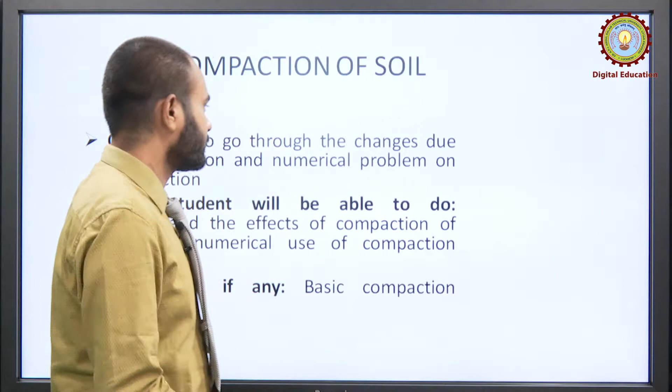Today let us move forward and see the effect of compaction on different parameters of the soil. We will go through the changes due to compaction, and we will also solve some numerical problems. Let us see one by one.

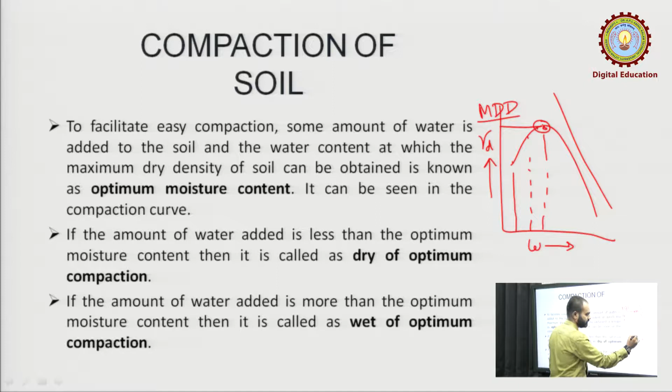First, recall what we discussed about compaction and the compaction curve. Here we have water content on one axis and gamma d, or dry density, on the other. At different moisture contents we get different gamma d values, and the highest value is called MDD, the maximum dry density.

Corresponding to this maximum dry density, there is a water content named OMC, optimum moisture content, or OWC, optimum water content. We already discussed this in our last class. This line was actually the zero air void line.

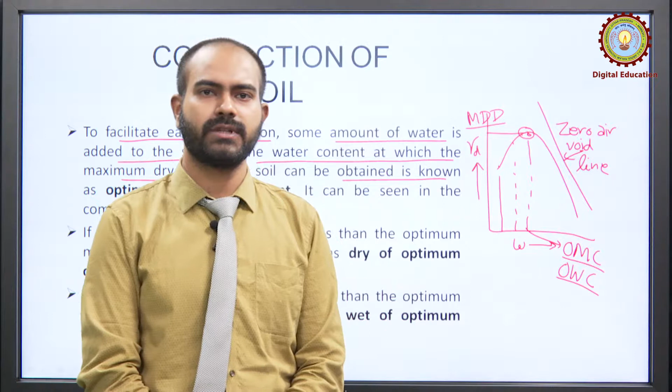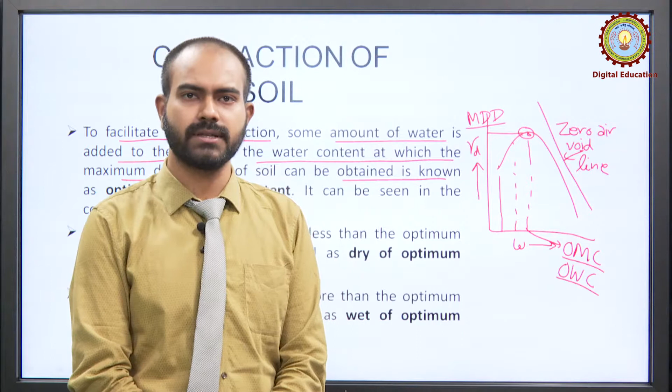Now let us see further. To facilitate easy compaction, some water is added to the soil, and the water content at which maximum dry density is obtained is known as optimum moisture content. If the soil is dry, compaction will be hindered because the particles remain in flocculated form, resisting compaction. But as we increase the water content to a certain level, the particles get dispersed, allowing better compaction.

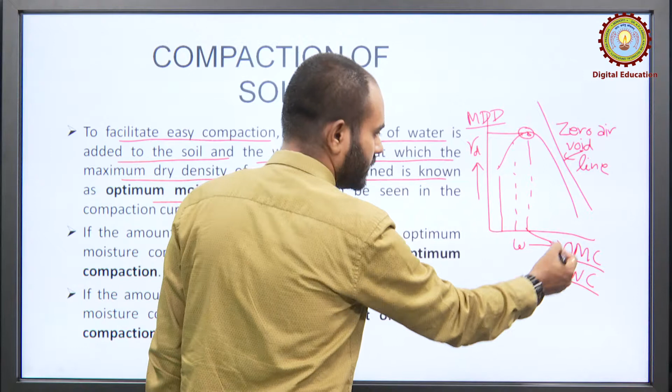But remember, it is not always the case. Only up to a certain level will the MDD be obtained or increase; after that, it will decrease slowly. So if water is added to the soil up to a limited amount, we get the maximum dry density, and the corresponding point is called OMC, or optimum moisture content.

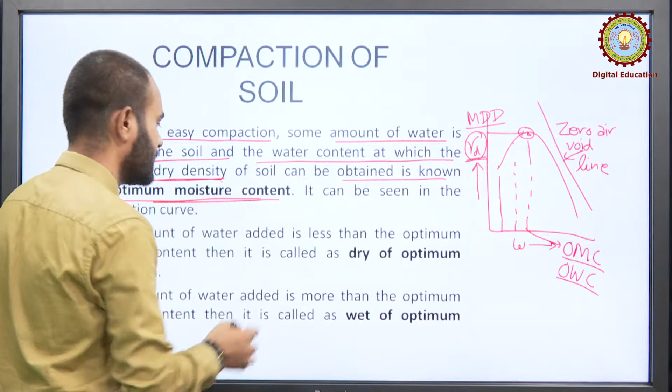Now if the water content added is less than the OMC, it is called dry of optimum compaction, and if the water content is more than OMC, it is called wet of optimum. If this line is your OMC, the area on either side is divided into two parts: compaction done on one side is dry of optimum, and on the other side is wet of optimum.

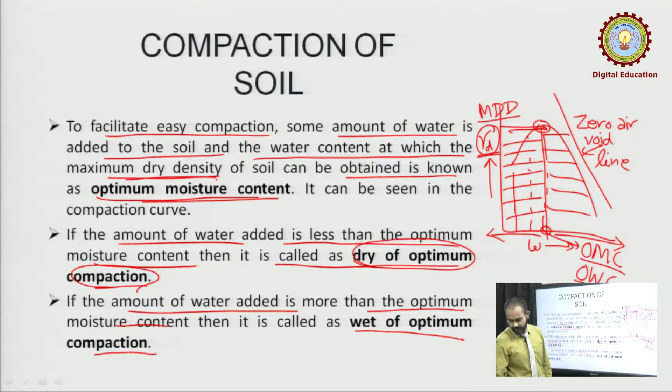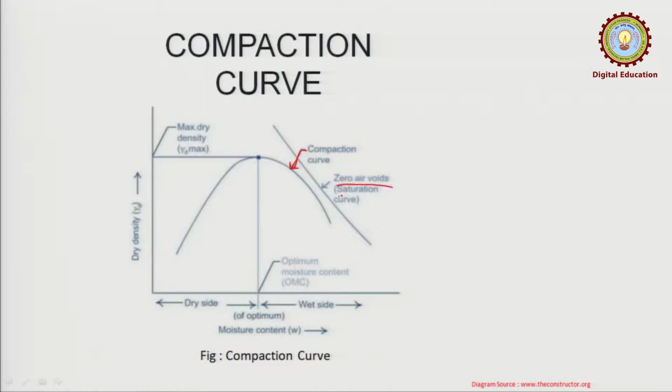You can see the graph here. This was the compaction curve, and this was the zero air void line. This point is OMC, as I just told you, and this is MDD.

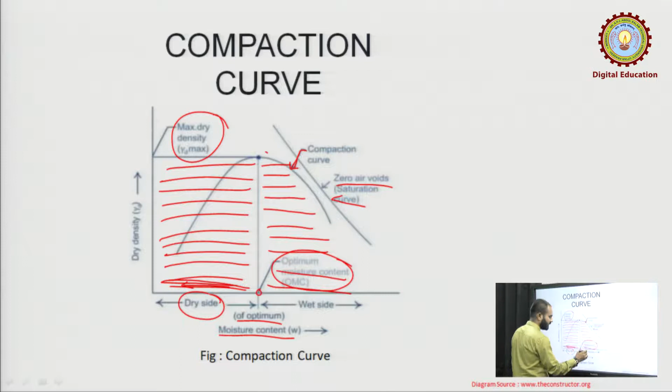Now this part, where the water content is less than OMC, is this area, where we have less water content. In this other area, the water content is higher than OMC. So since the water content is less than OMC here, we call it the dry side, or dry of optimum, and the other side is called wet of optimum, or wet side.

Now when compaction is carried out in this area, it is called dry of optimum compaction, and when carried out in this other region, it is called wet of optimum compaction. So this is the general or basic concept.

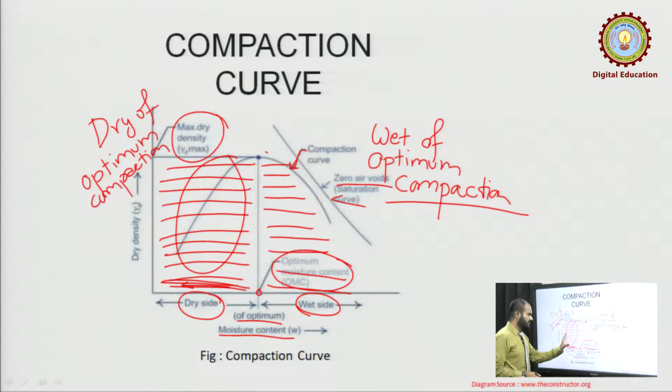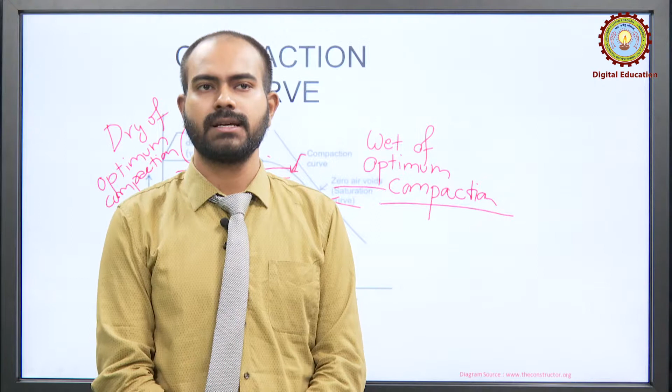Now what we will be doing is discussing one by one the parameters of the soil that get disturbed or changed due to the different procedures of compaction. Let us see the main features which get affected due to compaction.

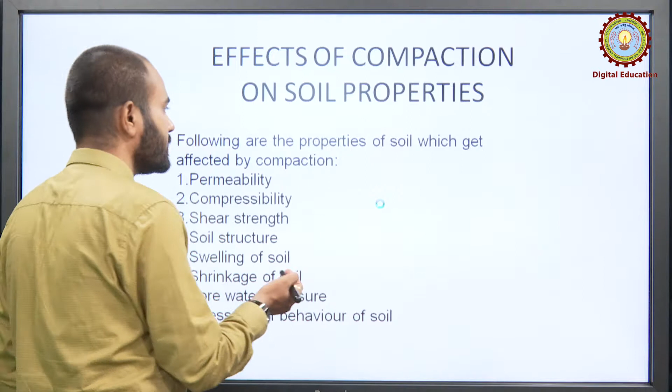Effects of compaction on the soil properties. What are the properties which are mainly affected due to compaction? Permeability, compressibility, shear strength, soil structures, swelling of the soil, shrinkage of the soil, pore water pressure and stress strain behavior of the soil.

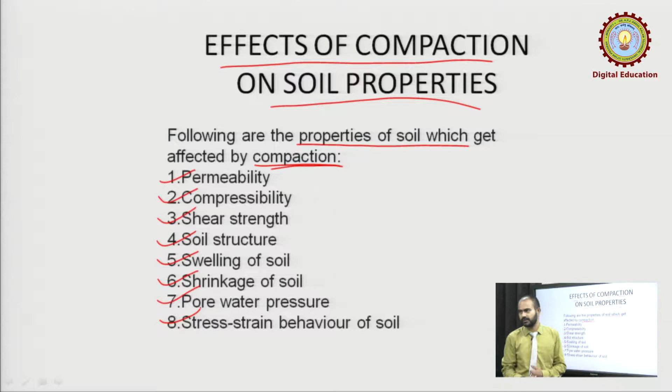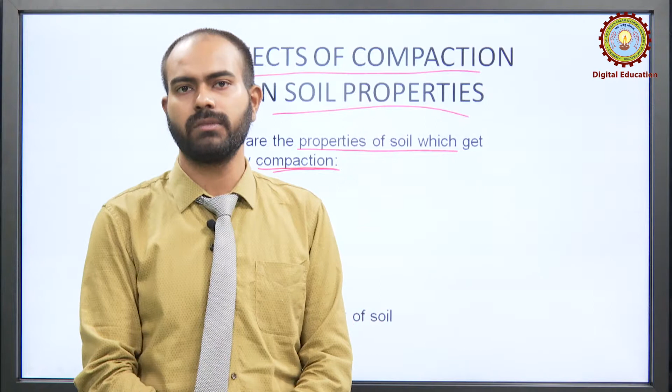Now we will be discussing one by one. We will divide this study into two parts, as I have already told you, the dry of optimum and the wet of optimum. We will see how the property is affected if we compact it on the dry of optimum side, and how it is affected if we compact it on the wet of optimum side. Let us see one by one.

The first one, permeability. You know what is permeability? It is the ease with which, in our case, generally we will be talking about soil. Let us talk about water only, because soil generally encounters water only. So ease with which water is permitted through the voids of the soil.

This is the meaning of permeability. Now let us see how it gets affected. Compaction reduces the voids present in the soil, hence permeability also reduces. You know that before compaction, the particles are flocculated, it may be flocculated something like this. Now when we increase the water content to an extent, or we are talking about compaction, if compaction is made or dynamic force is applied, what will happen? The flocculation will break, it will come into somewhat an arranged way. If it comes into an arranged part, then what will happen?

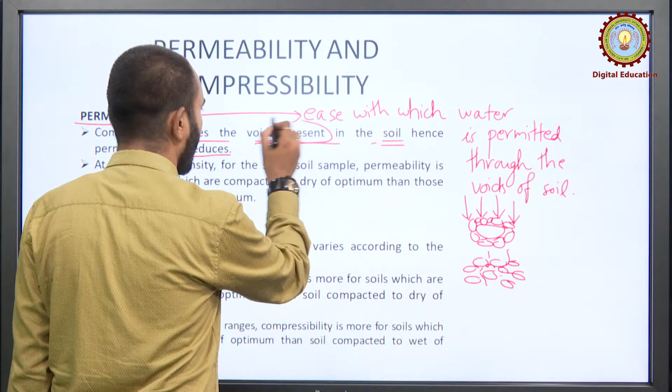The permeability will obviously decrease. Here it had a large permeability, you can see. Now the permeability has reduced. The voids have reduced, because what is compaction? It is the process of omitting the voids from the soil. So if there is no void, how will the permeability be affected? Obviously it will get reduced.

Now, at a particular density, for the same soil sample, permeability is more for soils which are compacted dry of optimum than those compacted wet of optimum. What does this mean? Same soil, same density. So if we say the density is same, you can say something like this, this is gamma. So same density, we are talking about same density here, and same soil, obviously it is the same soil or a single soil.

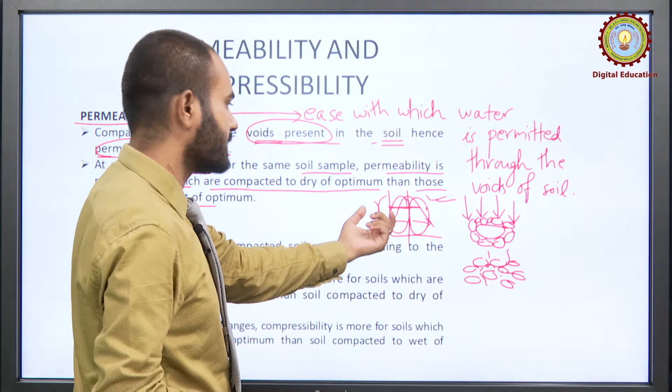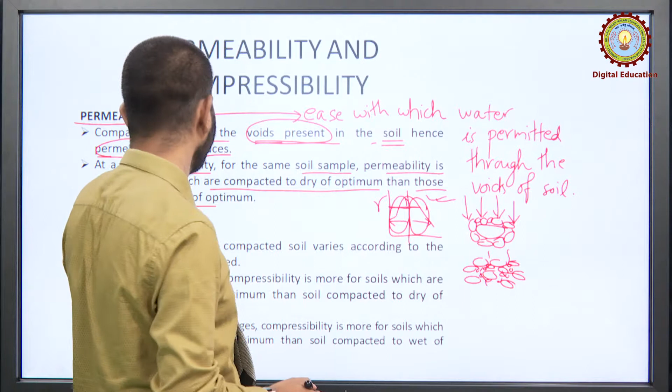Permeability, if the compaction is done on the dry of optimum side and wet of optimum side, if it is done on this part, what will happen? Permeability is more, and here the permeability is less. Why is it so? Because in this part, if the soil is compacted, the moisture content is less. So there is air in the voids, more air will be present in the voids.

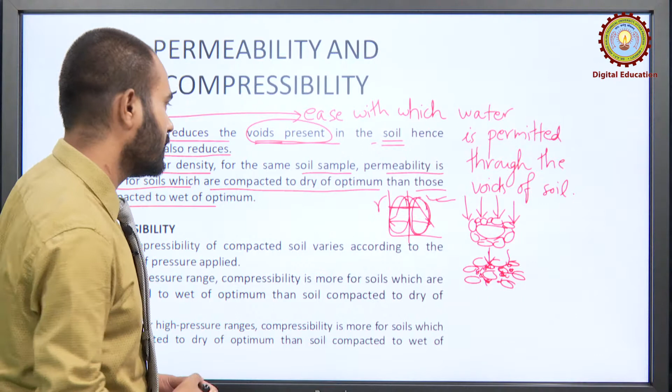Since more air is present in the void, the water will be easily permeable through these voids, pushing the air away. But in case of wet of optimum, the water has already replaced the air in the voids. So now it has to do more effort to push the water and move through the voids. Due to the same reason, permeability is more in the soil compacted dry of optimum, and otherwise less in the wet of optimum.

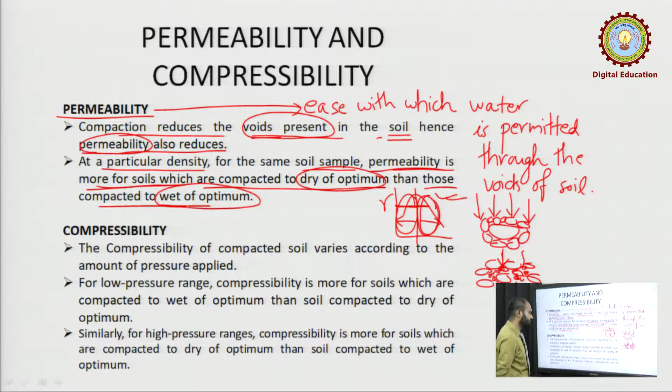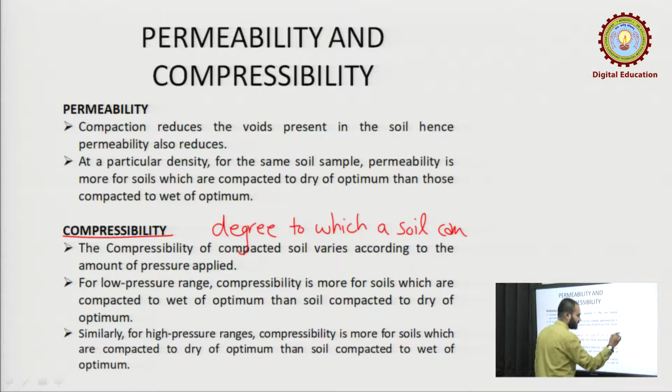So let us move further. Compressibility. What is compressibility? It is the degree to which a soil can be compressed. This is called compressibility.

Now let us see how it will be affected due to compaction. The compressibility of compacted soil varies according to the amount of pressure applied. Obviously, it will depend upon how much compaction force you are applying to that soil. If you are applying low pressure range, meaning low compaction energy, then what will happen? Compressibility is more for soils which are compacted wet of optimum than the soil compacted dry of optimum. What does this mean?

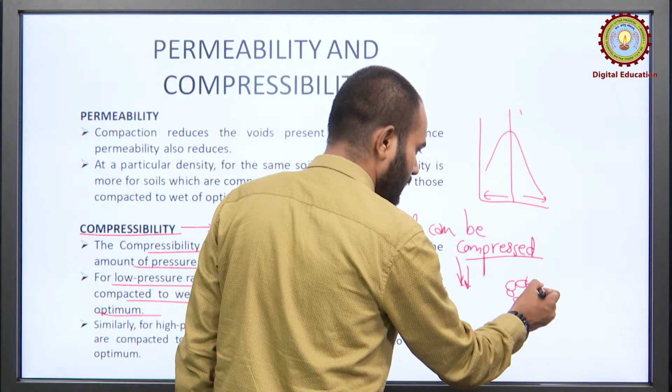If there is low pressure, suppose this is the curve. Now we are talking about this side and this side. What will happen in the compressibility part? You know that when the soil is in dry state, it will be in the flocculated form. And once there is flocculation, it will resist more. It will resist the compaction energy more, or we can say that it will not get compacted easily, or it will get compacted in a lesser manner.

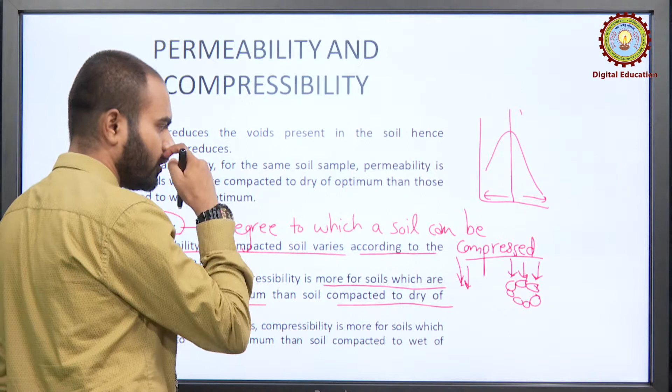So due to this, what will happen? The compressibility will be lesser, because it does not get compacted or compressed. It will try to retain its shape of flocculation.

But if we move further, when the moisture content is increased, what will happen? They will get dispersed, and somewhat arranged in this manner. If there are other particles like this, and we apply the compactive effort, this will get arranged, something like this. So the volume, suppose this was like this, now it will get compressed and become like this. So we can see that the compressibility is more now.

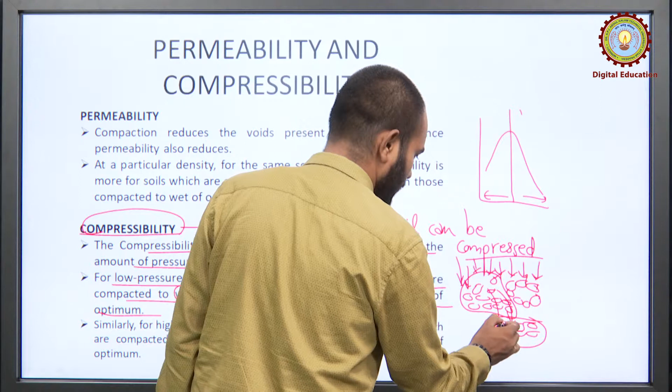So, more compressibility in wet of optimum and less in dry of optimum. This was for low pressure. Now, in case of high pressure range, what will happen?

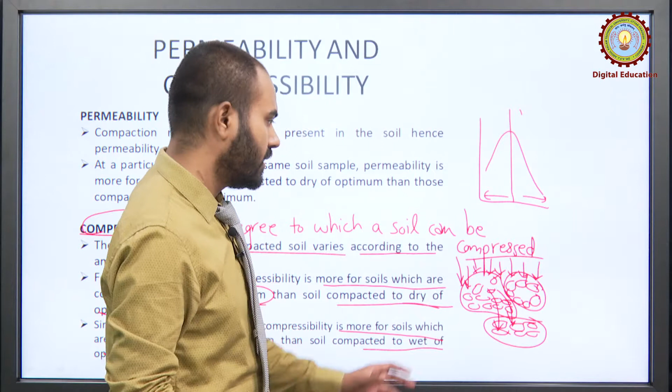Compressibility will be more for soils compacted dry of optimum than those compacted wet of optimum. Why? As I already told you, in dry of optimum the soil structure is flocculated. Flocculation means in the low range, if pressure is applied, they will resist the force and won't get compressed.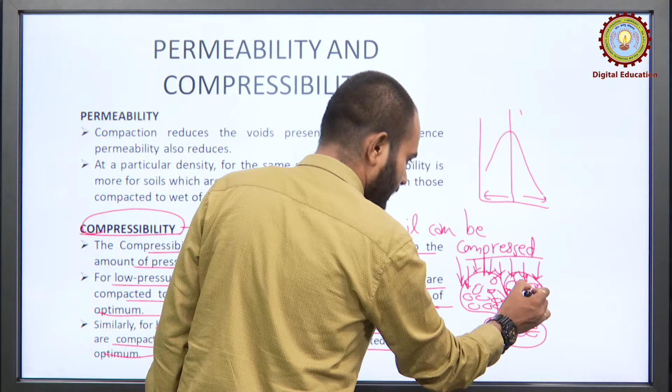But once you increase the pressure range, what will happen? Due to this, they will get broken, their bond will get broken due to high pressure, and they will get arranged something like this. So compressibility will be very high, because you can see there was a huge void here and now it has reduced to a minimal point. So the compression will be very high in this case.

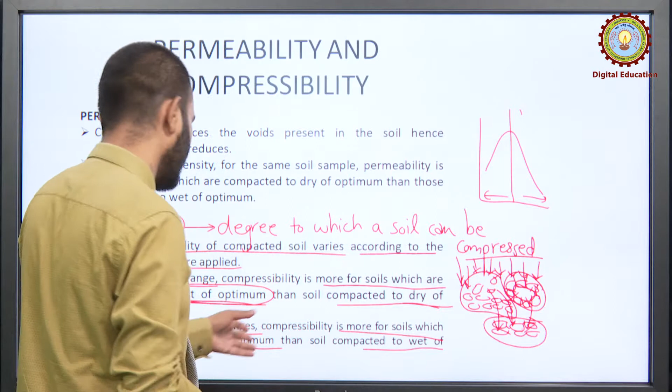Let us move further and see what will be happening in wet of optimum. In wet of optimum, they already get arranged in a good manner, so some arrangement is done by the compaction only. That much arrangement can be done by the low pressure range as well. So applying high pressure range to the wet of optimum won't give you high compressibility, because it is already arranged in the most compressible way. So comparatively, the degree of compression will get reduced in this part and will be very high in the other part.

So this was the concept. Now let us move to the next.

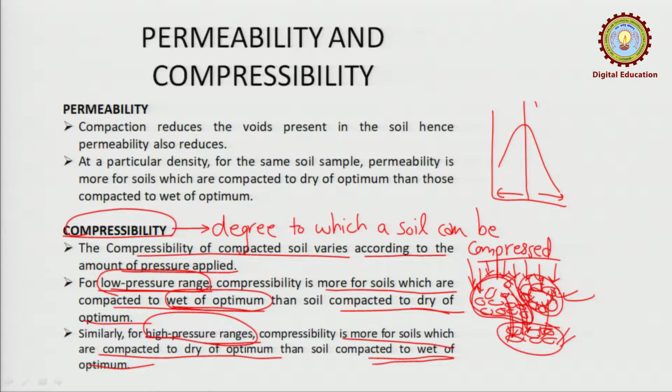Shear strength. I think you know what shear strength is, I have already spoken about this. Now let us see how it will be getting affected.

Shear strength of soil compacted dry of optimum is more than that compacted wet of optimum at low strains. Again at higher strain, compacted wet of optimum will have more shear strength. What does this mean? The shear strength is actually the bond between the soil which will be resisting the shear. Somewhat you can say, if this is the ground, shear means it will break from here, this part will move relatively, this will move down, this will move up, something like that.

So this will be shear. Now, if we compact on the dry of optimum, the shear strength will be more. Dry of optimum means less moisture content - remember this is dry and this is wet. So in the shear strength part, if soil is compacted in the dry, then more shear strength than the wet. Why? In the low case only.

Why is it so? Because as you know, in case of shear strength we have to compact the soil greatly. The more the soil is compacted, the more the bond strength will increase, so they will resist the movement like this. In case of dry of optimum, there is flocculation as I already told you. This flocculation is good in strength, because at low strain it will not break, as I told you just before - it will try to retain its shape.

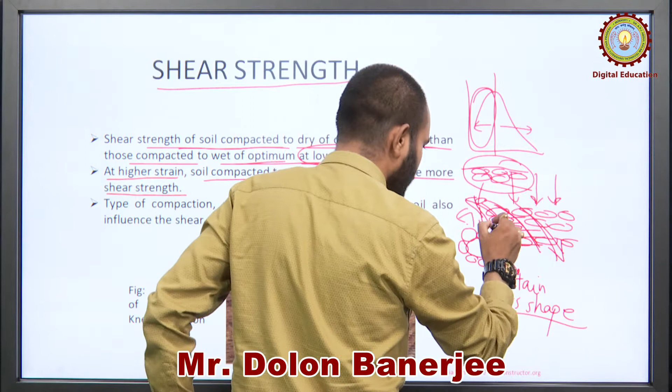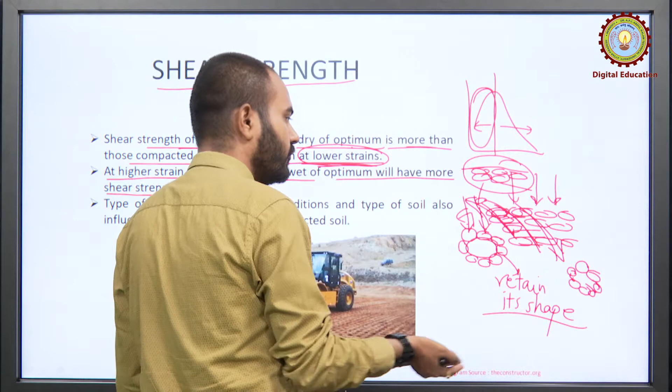At low strain it will try to retain its shape. So what will happen due to this? At the dry of optimum, we can say this will show more shear strength. Why? This will form like this. If it is a flocculated structure, they are bonded in a greater manner, then if compacted in the dry of optimum part, this will not break, this will remain as it is. So this won't allow any relative movement between particles, they will remain as a single body. So shear strength is more.

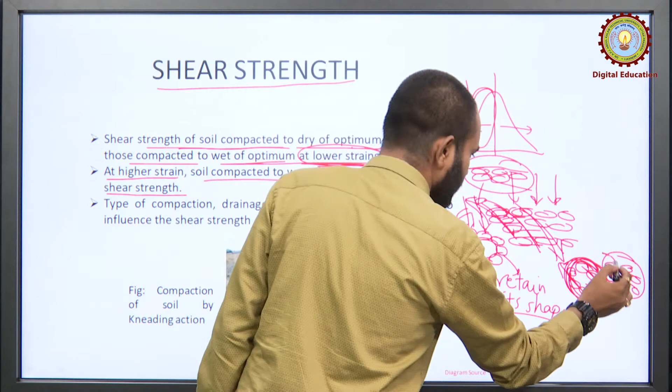But if it is wet of optimum, then what will happen? This will get dispersed, and due to which shear strength gets reduced. At higher strain, as already mentioned, this gets broken into something like this. So what will happen now? As it is already broken, there the possibility of shear strength will be more. So it is written that soil compacted to wet of optimum will have more shear strength, because in the dry part, what has happened now, it has gone to dispersion.

Besides shear strength, the shear strength parameter also depends upon type of compaction, drainage condition, and type of soil. You know that different soils are compacted in different ways. This diagram shows kneading action, which is generally used for cohesive soil. You can see the projections on the roller. When the roller rolls from here to here, you can see patterns made on the ground, because this gets inserted into the ground, causing the kneading action. This is generally favorable for clayey or cohesive soil. So different compaction methods also affect how the shear strength will behave.

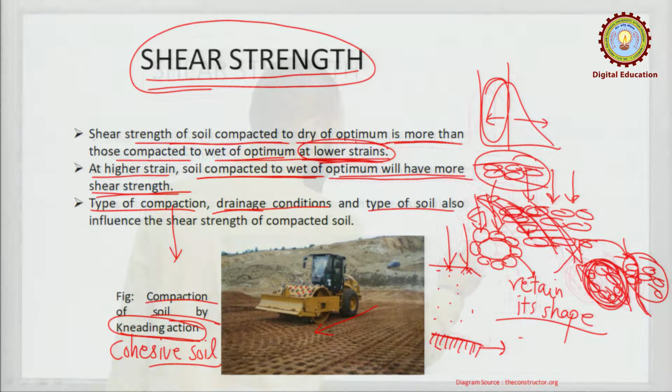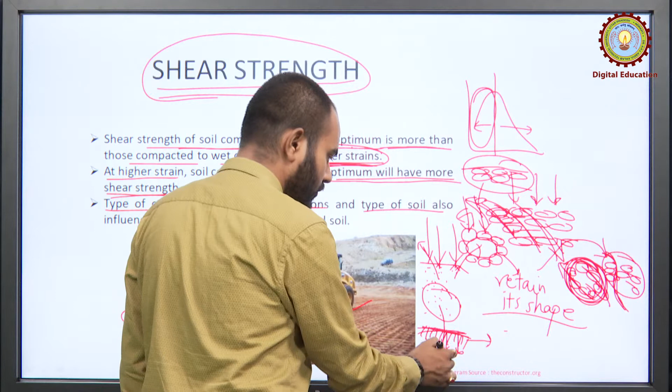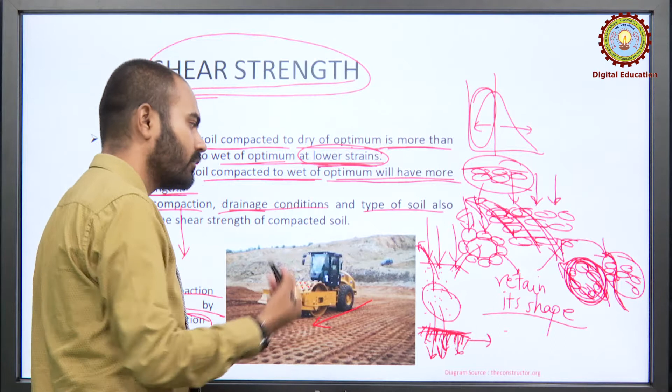Drainage condition - what do you mean by that? Suppose there is a ground, just assume this is the whole soil, this is the ground and somewhere there is rock, or hard impermeable strata. Now what will happen? Once you are compacting it, there will be water and air in it. Air gets oozed out due to compaction. What about water? If drainage was allowed on this part also, then some part of the water would have gone out from this part and some from that part. Now, as this is already restricted because this is rock, it won't let water go out. Only that amount of water which can go out from this face will be able to move out.

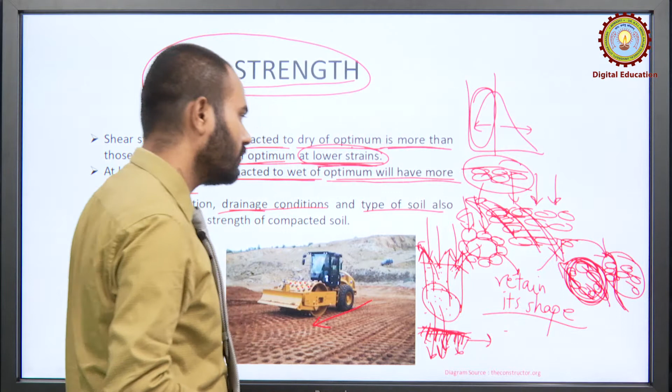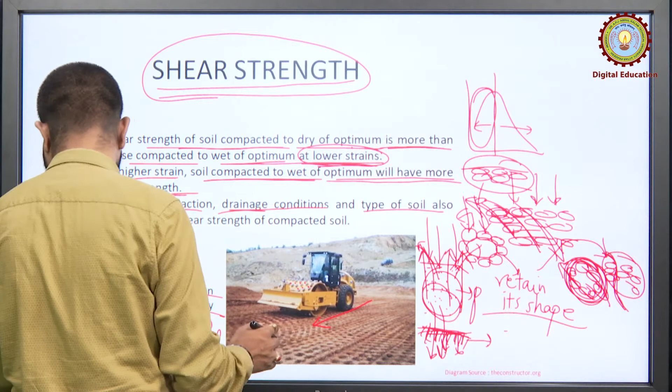Due to this, the drainage condition, or the water inside, will also cause pore pressure. Remember, this is the ground and this is the soil. So once water starts getting out, the part which won't be able to get out will cause pore water pressure. So due to this also, the shear strength gets affected.

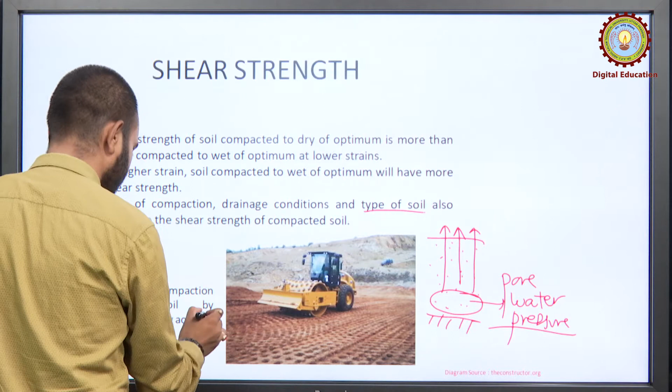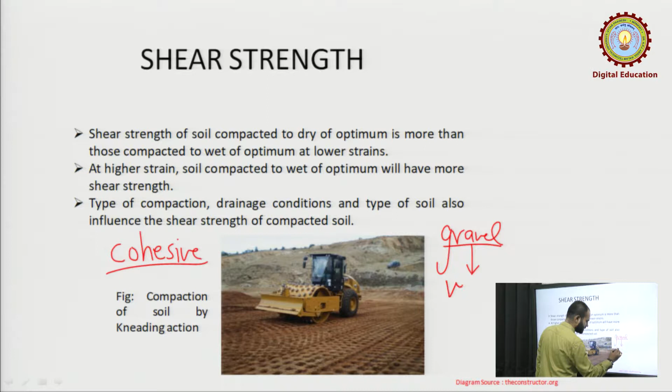And type of soil - obviously you know, mainly the shear strength concept is related to cohesive soil, only mainly related with cohesive soil. Cohesionless soil such as gravel will show very little shear strength. So this was the case, let's move forward.

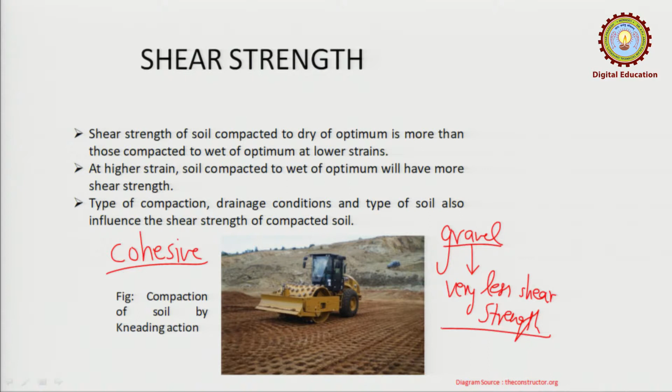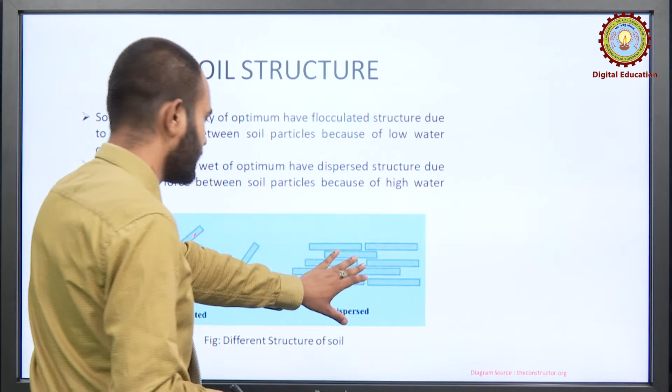Soil structure - as you have seen in the figure, this is the flocculated and this is the dispersed one. So what are we relating with this? Soil compacted dry of optimum has flocculated structure due to the attraction between soil particles because of low water content. Soil compacted wet of optimum has dispersed structure due to repulsive force between soil particles because of high water content. This I have already explained before as well.

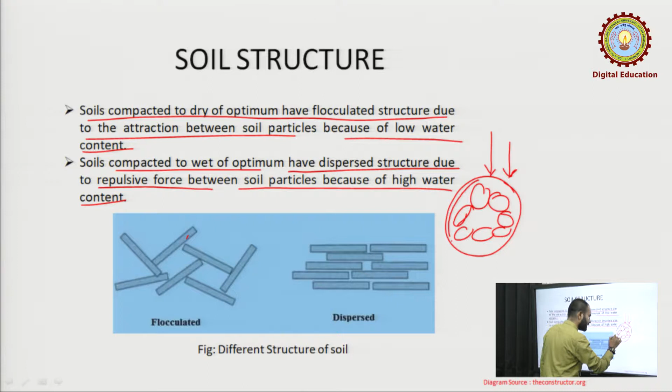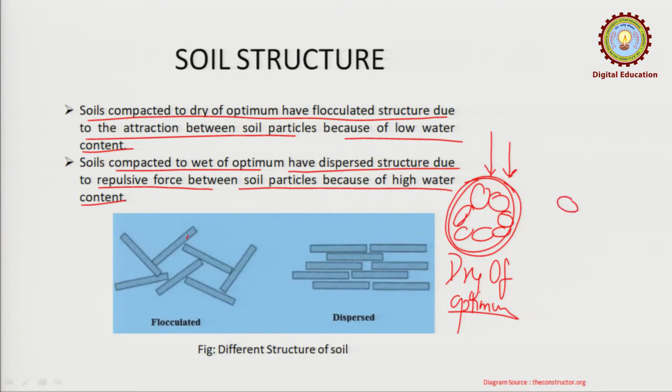On the dry side of optimum, the structure of the soil will be flocculated, something like this, and they have good amount of energy to resist the compactive effort. So the structure of the soil after compaction may also remain flocculated - this was for dry of optimum. And in case of wet of optimum, what will happen? Some gets already arranged and some may remain like this. Once you compact them, this will come like this, as you have seen here also. So this is wet of optimum.

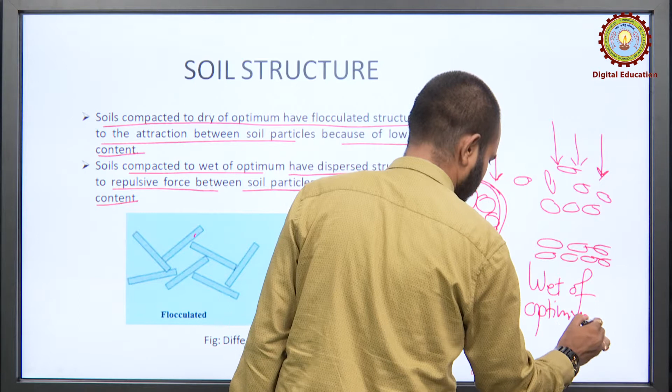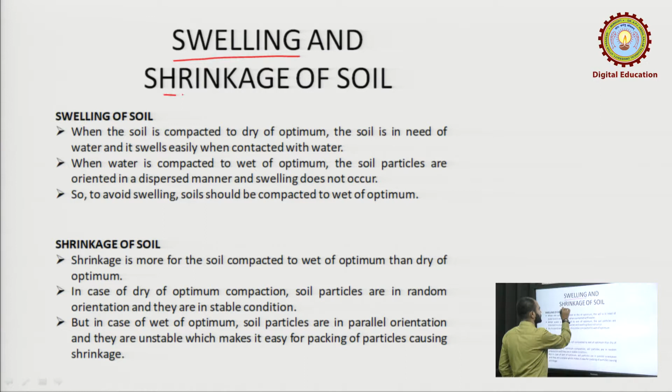Okay, so this is the case: swelling and shrinkage. What is swelling? Actually, swelling of the soil means when we add water, how much volume change it shows. Okay, this is what swelling means.

If you remember, we already talked about Montmorillonite and kaolinite, and we talked about the activity of the soil. So what was happening there? The swelling was very high due to these two, kaolinite and Montmorillonite, and also illite. These three were causing the high swelling of the soil, so we also termed it as expansive soil.

Okay, so now let us see how it is related here. When the soil is compacted to the dry of optimum, the soil is in need of water and it swells easily when contacted with water. When the soil is compacted wet of optimum, the soil particles are oriented in a dispersed manner and swelling does not occur. To avoid swelling, soil should be compacted wet of optimum. This is an important part.

Now, shrinkage of soil. What is shrinkage of soil? Just opposite to swelling. What does this mean? Once you remove water from the dry part or wet part, what will be the effect of this removal on the soil structure or the soil itself? We will be seeing this now.

Shrinkage is more for soil compacted wet of optimum than dry of optimum. Why? Because here there is already a lack of water, so there will be less water. If that much water is removed, some volume change may occur, but it will be less than the volume change here, because here we have a large amount of water, so the particles are dispersed. More water will get removed once you cause shrinkage here, or remove water from the wet of optimum part. So due to this, more shrinkage will be shown by this part than the other.

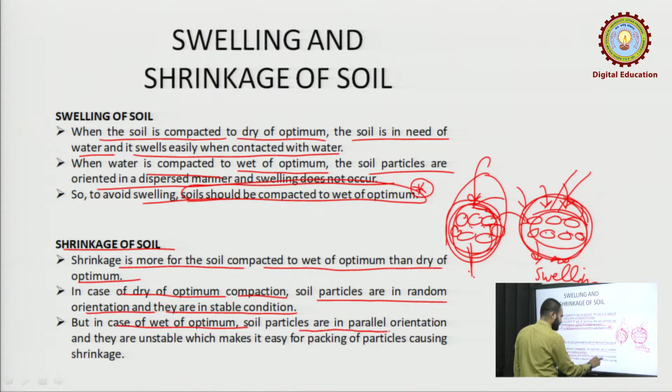The same is written here. In case of dry of optimum compaction, soil particles are in random orientation and they are in stable condition. Stable means they are not dispersed. They are already in this arrangement and they remain so even though water is removed, so there is less shrinkage. In case of wet of optimum, soil particles are in parallel orientation and they are unstable, which makes it easy for packing of particles, causing shrinkage. So this is talking about the same phenomena.

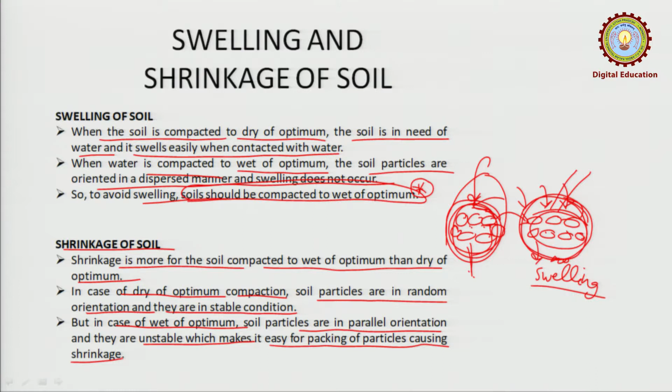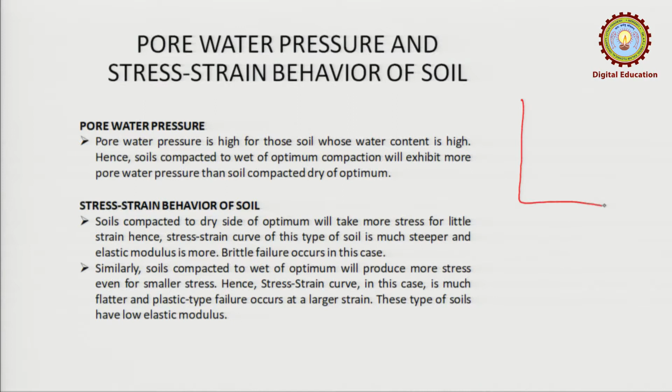Pore water pressure and stress strain behavior of the soil. What is pore water pressure? As I have already told you, water will be higher in one part and lower in another. Pore water pressure is caused by water. This is the pressure caused by water on the particles of the soil. If there is water here, it will cause pressure to it. This is the pore water pressure.

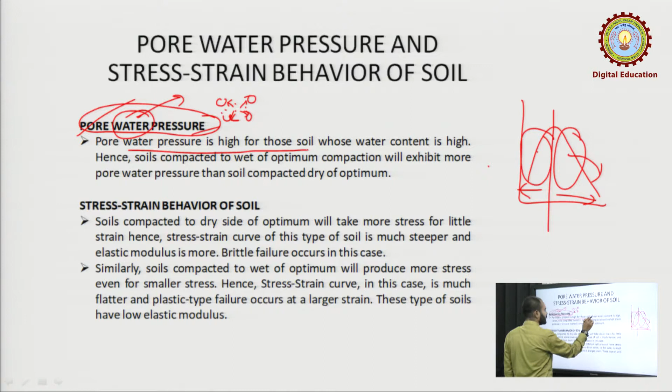So obviously, where we have less water, pore water pressure will be less, and where we have more water, pore water pressure will be more. Pore water pressure is high for soils with high water content. So soils compacted wet of optimum will exhibit more pore water pressure than dry of optimum. This is a simple concept.

Now, stress strain behavior of the soil means it is talking about the graph, something like this and something like this. Soils compacted to dry of optimum will take more stress for little strain. Hence, the stress strain curve for this type of soil is much steeper and the elastic modulus is more. Brittle failure occurs. This is the curve.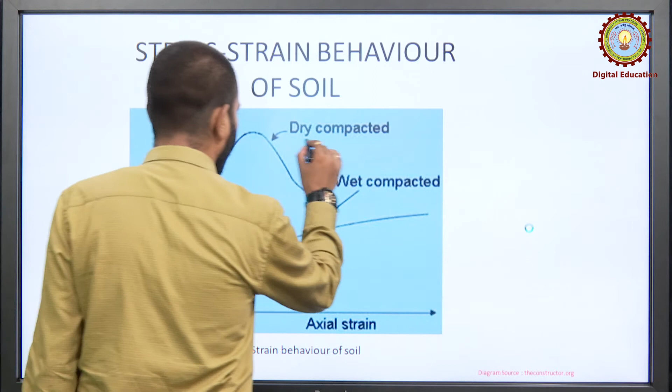We can see this in the next diagram. Here it is, this is for dry compacted soil and this is for wet compacted. What is the difference? Here, as there is a flocculated structure as I already told you, it can take very high stress without much strain. Strain is the change in dimension or length, delta L upon L, generally referred to as strain. So without much change in structure, high stress can be borne by these types of structures.

Why? Because they are flocculated and already bonded together in a good manner, with good strength. So up to a part you can see the stress is increasing very rapidly, but strain is not increasing comparatively. It is very high and it is low.

No dimensional change is taking place, because it can bear that much stress. But after that, what happens? This bond breaks. This is brittle failure, and you can see a sudden decrease in stress. Why? Because now this bond breaks, due to which the graph reduces.

In case of wet compact, what will happen? Gradual increase. You can see there is a gradual increase in the graph. What does this mean? Corresponding to the applied stress, the strain will increase, because now there is no such structure to resist. As you increase the stress, the strain will increase. So this gives a gradual increase.

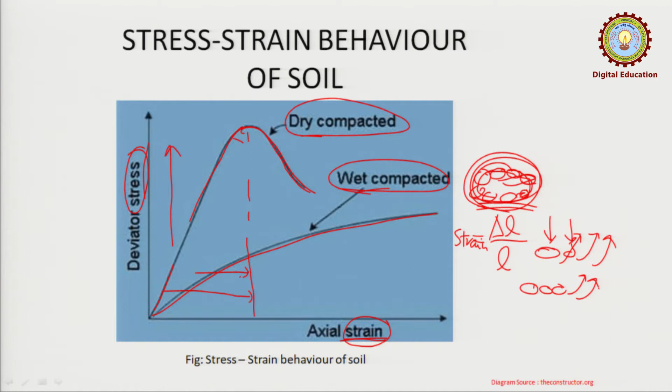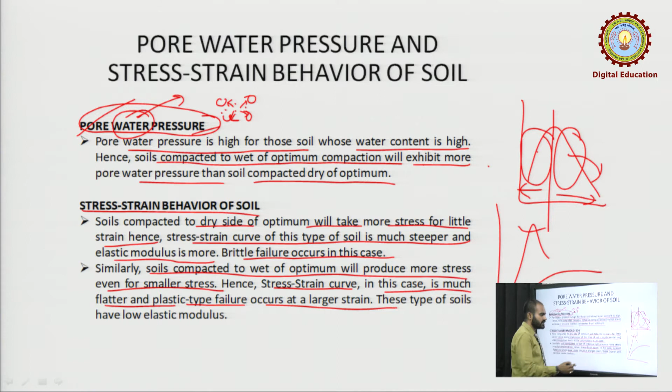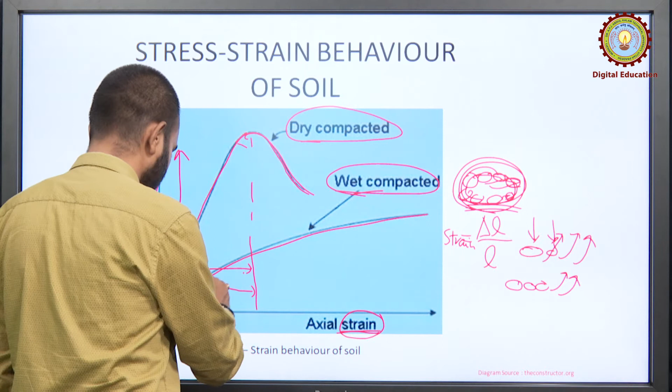Similarly, soil compacted to wet of optimum will produce more strain even for smaller stress. Hence the stress-strain curve in this stage is flatter, and plastic type failure will occur. What is plastic type? It means gradual failure. This is called brittle failure, and this is the plastic failure. In plastic failure, no definite point of failure can be obtained - there is no definite point, you cannot understand exactly where the failure has occurred. But in brittle failure, you can say here the failure has occurred.

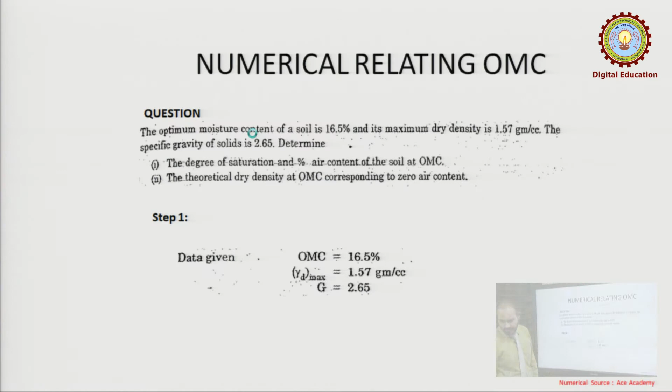Now let us go to a numerical problem about the optimum moisture content. Let us see what is given to us: the optimum moisture content of a soil, the maximum dry density, and the specific gravity of the soil solid are given. We need to determine, first, the degree of saturation and percentage air content at OMC.

Second, the theoretical dry density at OMC corresponding to zero air void - this is a different case. First let us see this one, this is an easy question. You know what we are given: OMC is given, maximum dry density is given, and G is given. We can use again the formula W into G.

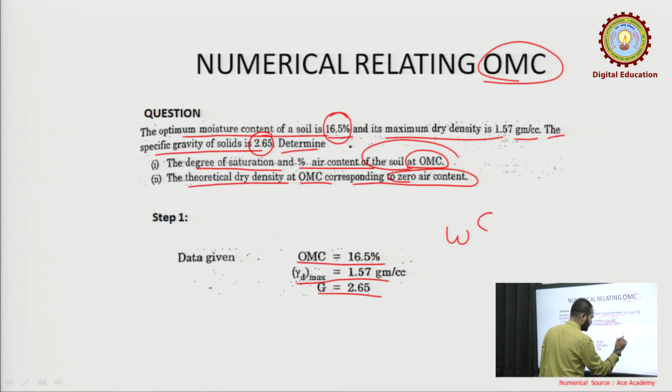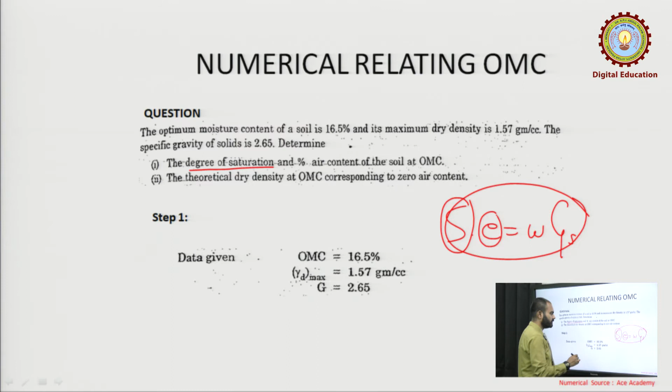The formula is S into e equals W into GS, or simply G. This is the formula. We need the degree of saturation, so we can find it from here, but we don't know e as well. So first we have to find e. What will we use? We will use the gamma D formula. Gamma D equals G gamma W upon 1 plus e. G is given to us, e we have to find, gamma W you know is always constant - for gram per cc it will be 1, else it will be 9.81.

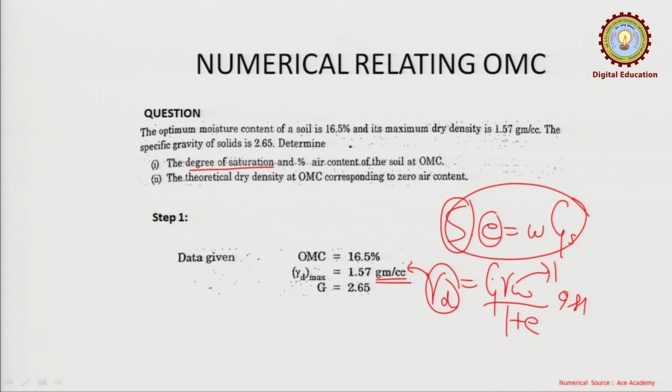You can see here the same formula is used. It is in gram per cc, so 1 is used, which is also in gram per cc. So here you have found e. Again the same formula is used to get S. That's the easy question. Now let's move to the second part.

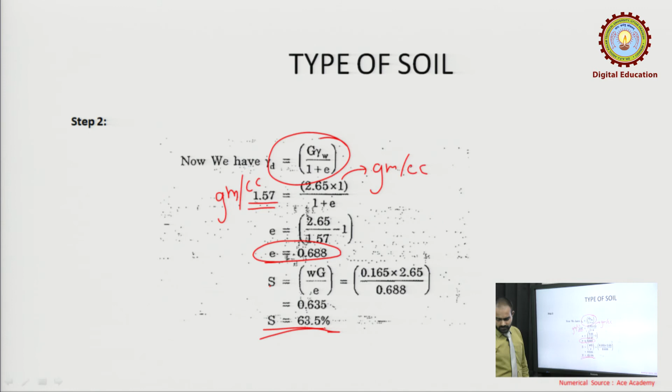We also had to find the percentage air content. If the degree of saturation is this, then if you remember, S plus air content was 1. So from here you can find the air content percentage. Now the next case where it was asked about zero air void.

We have to find zero air content, and corresponding to this we have to find the gamma. So what will we do? S is 1, again using the same formula, so you will get a new e. Now you can see a new e is obtained. Corresponding to this, again the same formula is used to get a new gamma D - this is the new one.

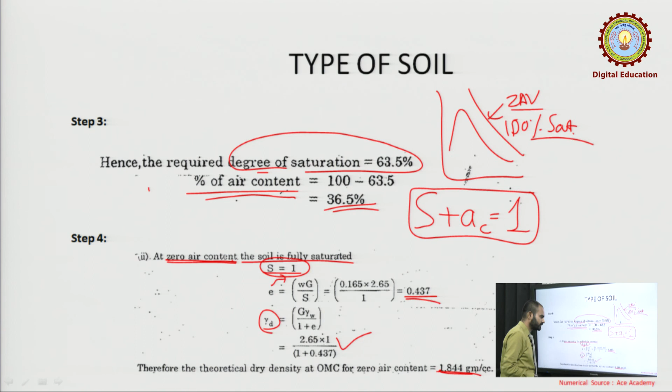In this case, what was different? S was 1; in the previous case, S was 63.5. Now it is 100%, fully saturated. You know that at the zero air void line, zero ZAV, or 100% saturation, they are the same. So since it is fully saturated, S will be 1, and from here we have calculated further.